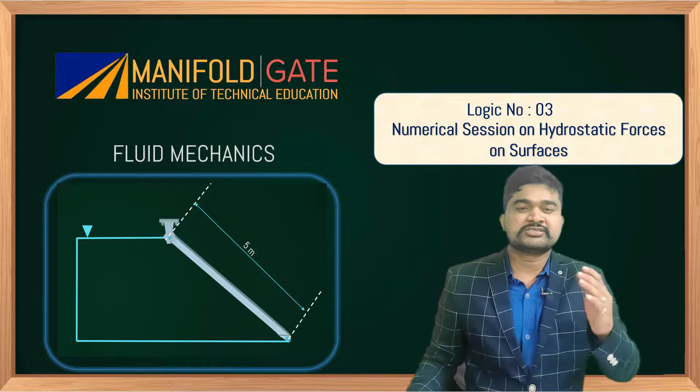Let's start the session. Read the question carefully. A hinged gate of length 5 meter inclined at 30 degrees with the horizontal, with water mass on its left - that means water is present to the left of the inclined gate, as shown in the figure. Density of water is given as 1000 kg per meter cube. The minimum mass of the gate in kg per unit width, width measured perpendicular to plane of paper, required to keep it closed is to be determined - to make the inclined gate closed.

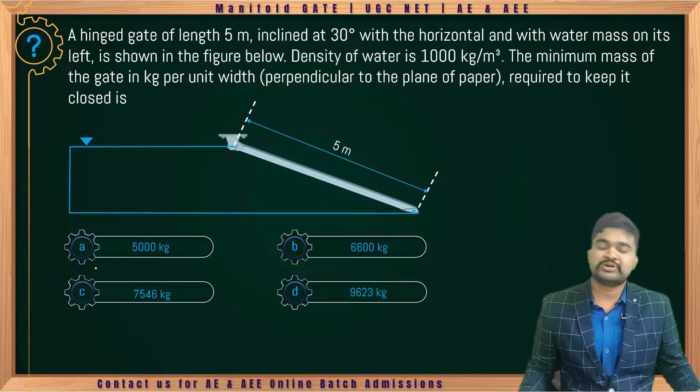So what is the mass of the gate we need to maintain? That we need to determine - mass of the gate in terms of kg we need to determine.

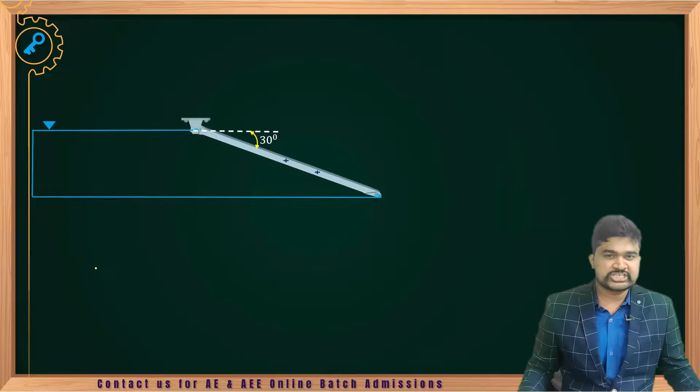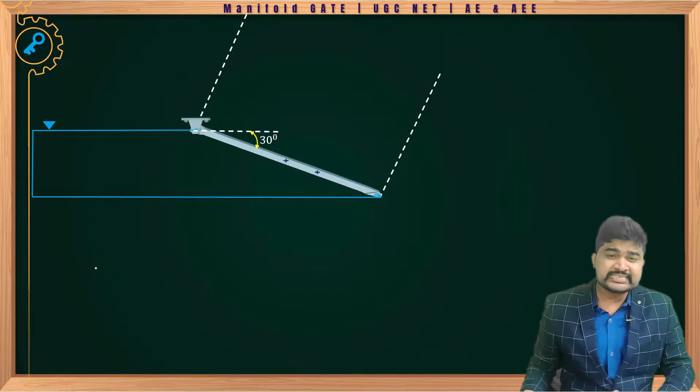Let's solve this problem. See the figure here. The inclined gate makes an angle of 30 degrees with the horizontal, with projection vertically upward. Once you see the gate from the side view, you can see the width of the gate. Width of the gate is W (or B) and length of the gate is 5 meter. G is the center of gravity of the inclined gate, P is the center of pressure.

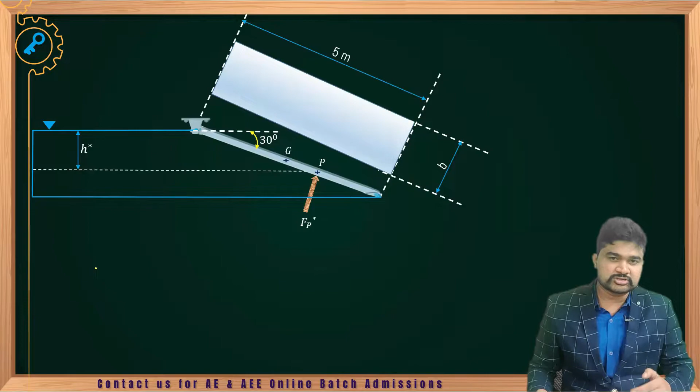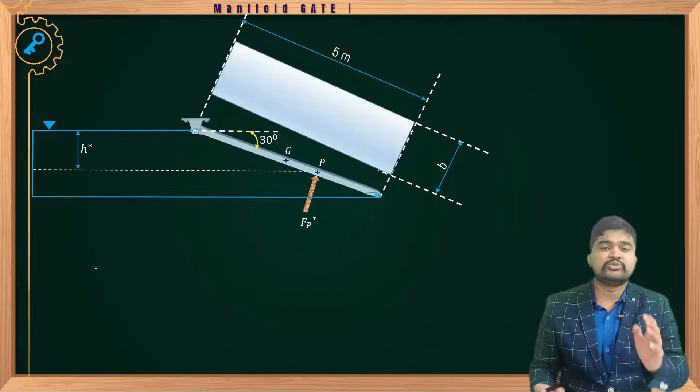First we need to determine the magnitude of hydrostatic pressure force acting on the inclined gate. After that, location of the hydrostatic pressure force, H star, we need to determine. Then you can draw the free body diagram for the inclined gate and apply equilibrium equations to determine the mass of the gate. Note weight always acts vertically downward.

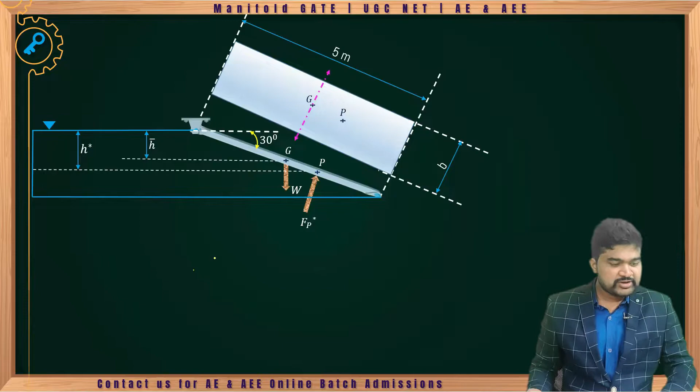As a first step, we need to determine the hydrostatic pressure force acting on the inclined gate, that is Fp star. What is the magnitude of Fp star? Fp star equals to...

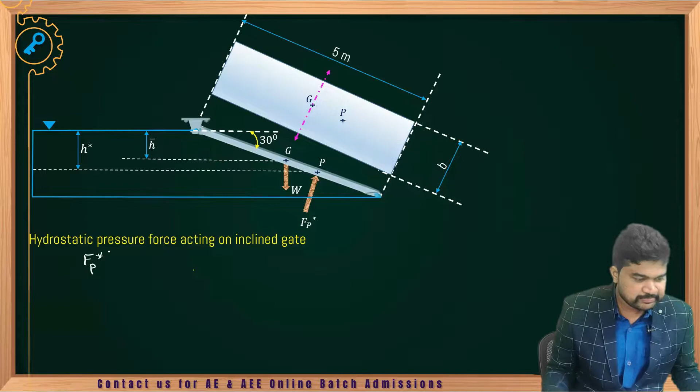rho g into A h bar. Here H bar is the distance between the free surface and the center of gravity of the inclined gate. So how to determine H bar?

The inclined length will be 2.5 meter, at 30 degrees. Once you construct a triangle, with this angle equal to 30 degrees, you will get H bar equals to 2.5 sine 30 degrees. So H bar equals to 1.25 meter.

What is the area of the inclined gate? That is nothing but width into length of the gate, that means 5B meter square.

Next, rho is nothing but density of the water present to the left of the inclined gate. We can say this will be 10 cube kg per meter cube into 9.81 meter per second square. Area is nothing but 5 times B meter square, and H bar is 1.25 meter.

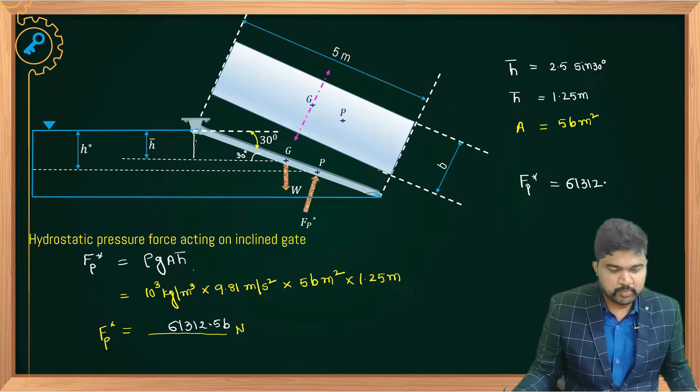So Fp star equals 61,312.5 B in terms of width of the gate, finally giving Fp star equivalent to 61,312.5 B Newton.

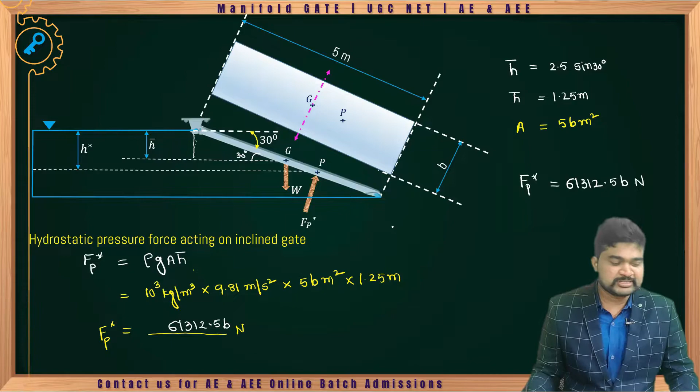Now we need to determine the location of the hydrostatic pressure force. The center of pressure we need to determine. How to determine the location of the center of pressure?

H star, as we know, is nothing but H bar plus IgG by A h bar sine square theta. Here theta is 30 degrees. IgG equals to B times 5 cube by 12.

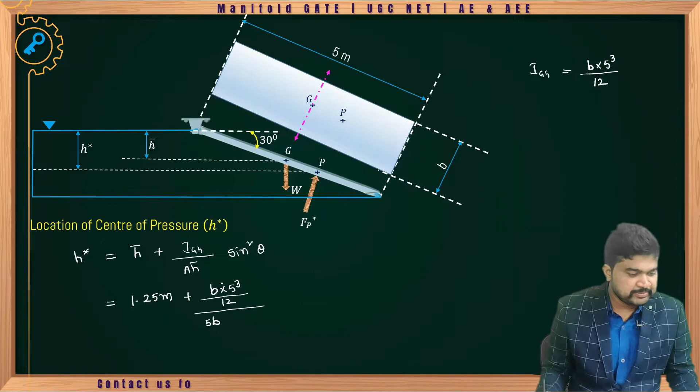Finally, H star is nothing but 1.25 meter plus B times 5 cube by 12, divided by area which is 5 times B into H bar 1.25 meter, into sine square 30 degrees. What is the magnitude of H star?

Dash meter - calculate and tell me. Now, what is the magnitude of H star? Calculate: B and B get cancelled out. We get 5 cube by 12 into 1 by 4 (since sine 30 is 1 by 2), divided by 5 into 1.25.

You will be getting 0.4166, plus 1.25. So finally, what value do you get?

So H star is nothing but 1.667 meter. So you located hydrostatic pressure force. Hydrostatic pressure force is acting at a distance H star from the free surface.

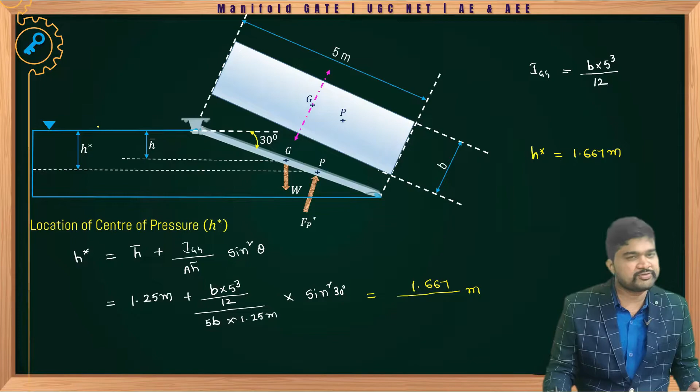Now we need to draw the free body diagram for the inclined gate. Weight always acts vertically downward. Weight of the gate is acting at the center of gravity, and hydrostatic pressure force is acting at the center of pressure.

To apply moments about the hinge O, you need to know this particular distance, OMG. From this triangle, we need to determine GM because we need to apply moment about O. Moment of W about hinge O is nothing but W into GM.

How to determine the magnitude of GM from this particular triangle? Here O, this is G, O, M, and G. It is 30 degrees. From here, this is 2.5 meter. And we need to determine MG.

And H star, H bar we know. H bar is 1.25 meter. You can apply cos theta or tan theta, that is up to you. What is cos theta from here?

Cos 30 degrees. From triangle OMG, cos 30 is nothing but MG by 2.5 meter. From here, MG equals to 2.5 into cos 30. Here 2.165 you will be getting.

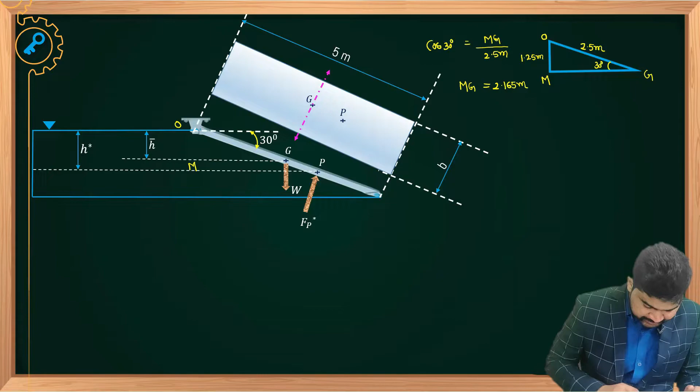2.165 meter. So if you want to apply tan 30, how much will you get? Tan 30 is nothing but 1.25 by MG. 1.25 divided by tan 30, that is also 2.165. Here MG, you got it.

It is very important to apply the moment. MG is nothing but 2.165 meter. One more distance we need to determine, that is OP.

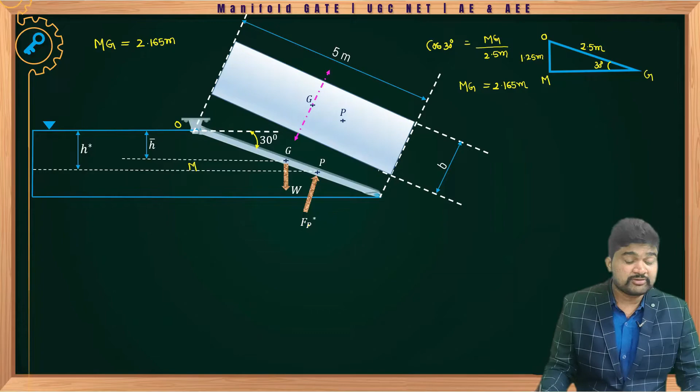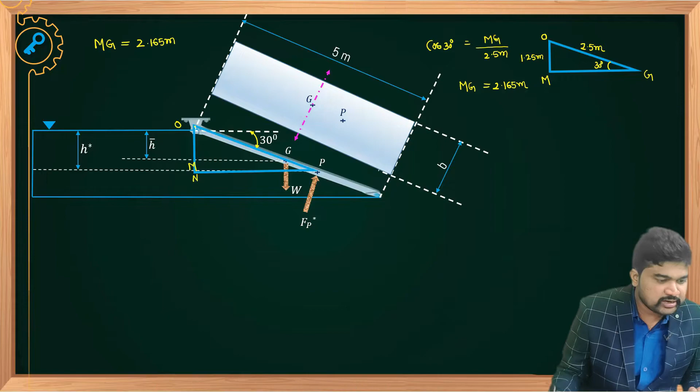Moment of FP star about hinge point O is nothing but FP star into OP. How to determine OP from the triangle? Here, this is ONP. So from this particular triangle, ON is nothing but H star.

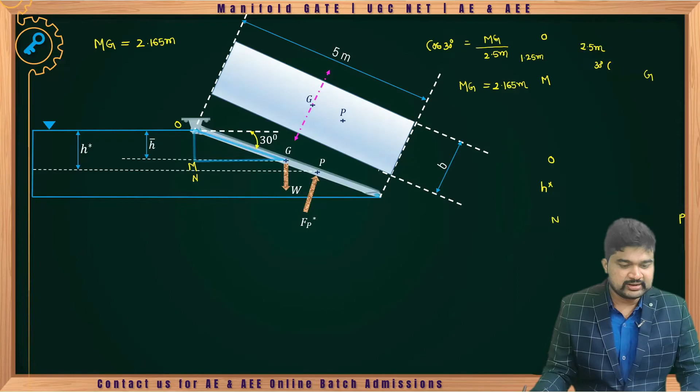This is H star. What is H star? Just now we determined H star is 1.667 meter. So we need to determine, this is 30 degrees.

How to get OP from this particular triangle? Just apply sine 30 degrees. Sine 30 degrees equals to H star by OP. OP equals to H star by sine 30, which is 1.667 by sine 30. So here OP equals to 3.334 meter. Now we can apply moment about the hinge O.

Once you apply the moment, sigma M about point O equals to 0. Moment of W about point O is clockwise direction. Moment of hydrostatic pressure force about point O is anti-clockwise direction. Sum of the clockwise couples equals sum of the anti-clockwise couples.

Now tell me what you will get. W into MG will be getting, equals FP star into OP, that is anti-clockwise direction. So now I can say that W is nothing but m into g.

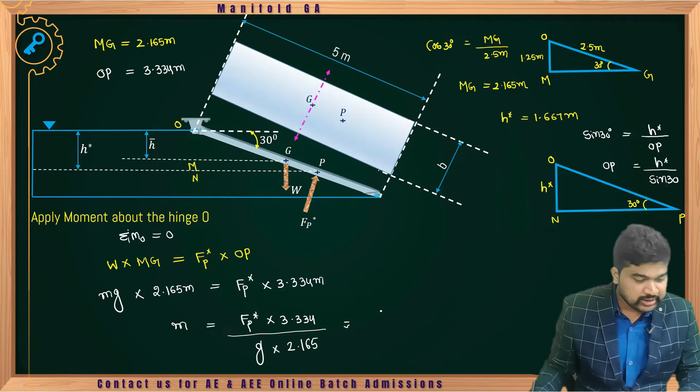Mass of the gate, we need to determine mass of the gate. M equals to FP star into 3.334 by g into 2.165. Just now we determined the magnitude of hydrostatic pressure force acting on the inclined plane.

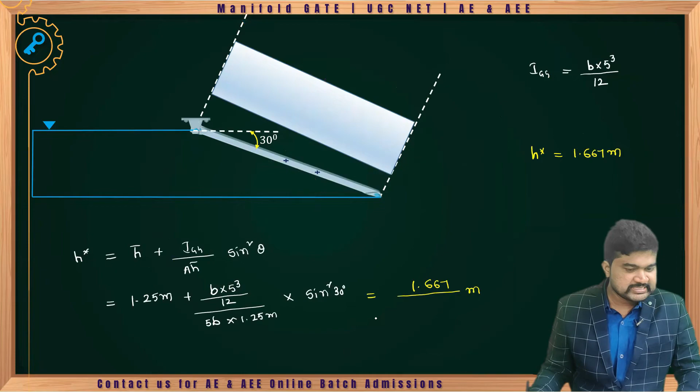Inclined gate, what is that? What is FP star? Tell me, 61312.5 B into...

3.334 by 9.81 into 2.165. What is the value of mass of the gate? Tell me. Okay, calculate and tell me: 61312.5 into 3.334 divided by 9.81 divided by 2.165. Finally, M equals to 9624.711.

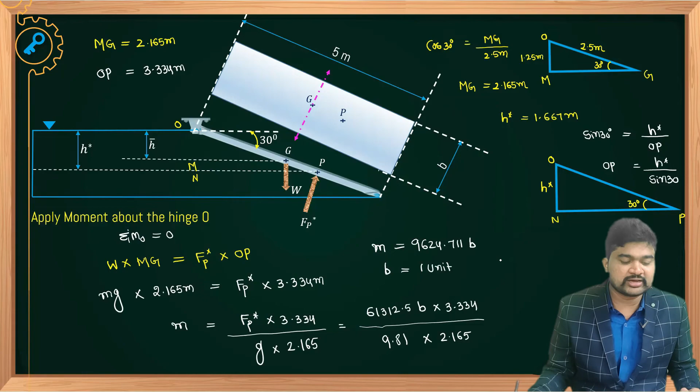This 9624.711 B, they have given per unit width of the gate. If you consider B equal to 1 unit, then mass of the gate per unit width, M equals to finally 9624.711 kg you will be getting.

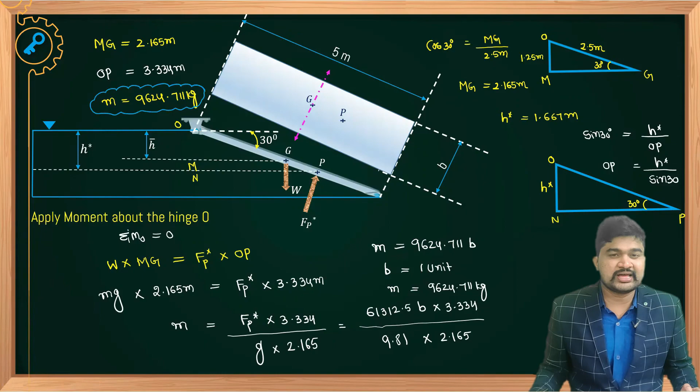Finally, what is the answer? Tell me, M equals to 9624.711 kg. Okay, so this is the answer, the final answer. What is the mass of the gate we need to maintain to close the gate? In order to close the gate, clear? So this is the mass of the gate, M equal to 9623 kg.

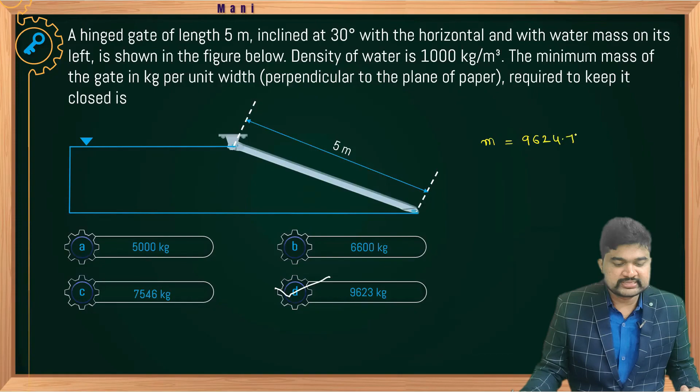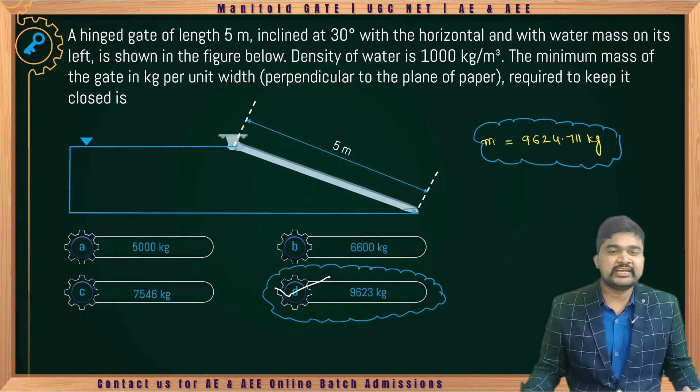M equals to how much you are getting? M equals to 9624.711 kg, this is the answer. So close answer will be thus 9623 kg. This question was given in GATE 2013 by IIT Bombay.